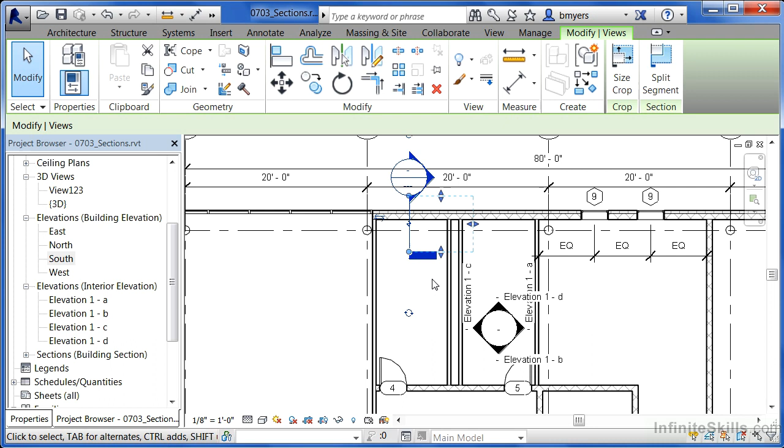I want to mention that there are dashes showing up here. The reason is that this will be the detail or section number, and this is going to be the page number whenever this view is eventually put onto a page. So when it comes time to do our construction documents, we'll move this section view out onto a page, and these dashes will automatically fill in with the correct information based on the information it has when it's placed on its sheet.

Also, we can see there's a little double arrow here where the section is at. If we select the little double arrow, that'll flip it from looking in one direction to looking in the other direction. There's a break mark here.

If you select the break mark, which is gaps in segments, it will allow you to split this line that makes up the section. This won't affect the way that our section view looks—it's just a documentation tool. Also, if you move your mouse up here and click on that break mark again, it'll automatically heal that particular section.

Another thing of note is that in order to see whatever you want inside of the section, this dash box gives you an idea as to what's going to be inside of this section. So in this case, we'd be able to see the back wall as well as anything else inside of this particular box.

If we wanted to see less of it, you can click on the arrows and drag them back. Now, because this back wall is no longer inside of this box, it will no longer show up inside of our section view. I'm going to click out here in space.

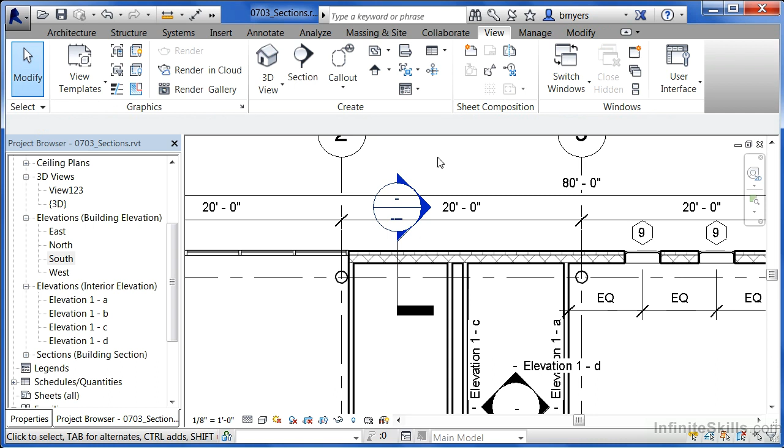Now let's take a look at this section by just double clicking really fast on the circular part of it. In this case, it's taken us to a building section that has a very low level of detail associated with it. If I zoom in a little bit, we can see that this is just some line work.

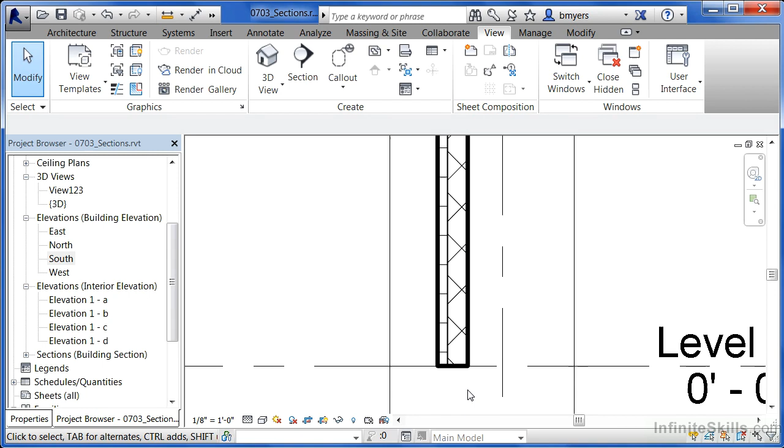But there's an option down here that says detail level, and if you change this to a higher level of detail—in this case I did a fine level of detail—you'll be able to see each layer of material associated with this particular item, in this case a wall. Now I'm going to move up here and click on the X to get out of this particular view.

Now let's do a full building section the same way. Come up here to Section, underneath the View tab, click once, move over, and click again. Hit Escape a couple times on the keyboard.

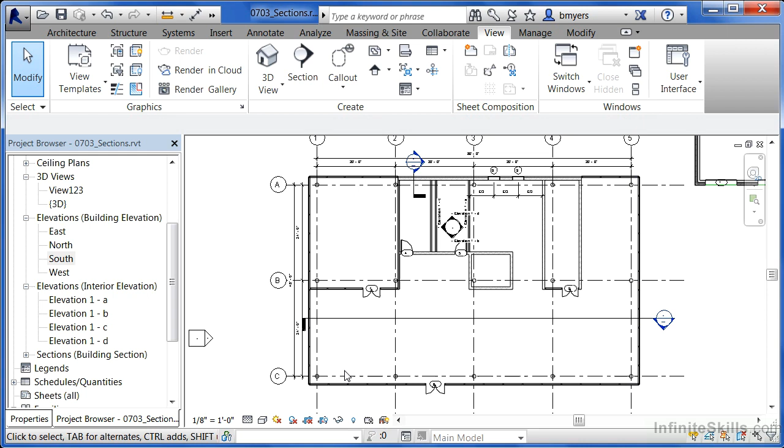Now, before when we did this, I double clicked where the circle was to see the view. You could still do that, but I want to point out that underneath the project browser, there's now a sections area. If you double click where Section 2 is at, that'll take you to your full building section where we can see everything that shows up inside of the section.

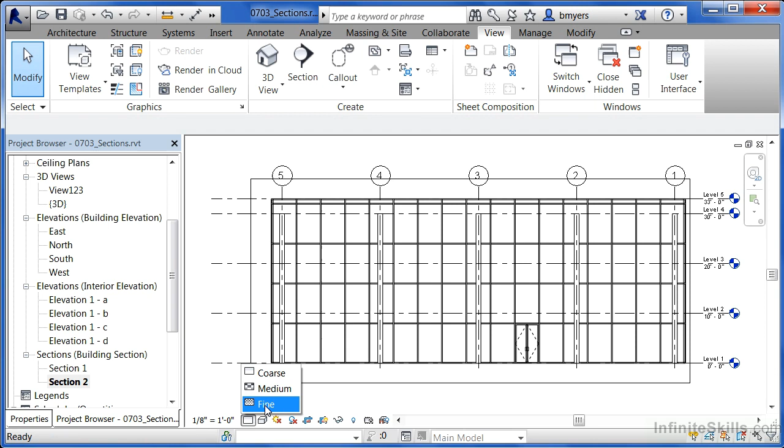And we could take the time to detail this out if we wanted to change the level of detail so things would appear slightly differently. In this case, let's try changing this to a fine level of detail and see if any changes actually occur. You'll notice that very little has changed, if anything at all.

The reason is that we're cutting through very little except for the mullions and the glass associated with each of these windows inside of the curtain walls. If these had had more elaborate detail, changing this to a fine level of detail may have given us more information. So the purpose behind sections is to be able to cut sections through your building so that you can see how different layers of material are put together.